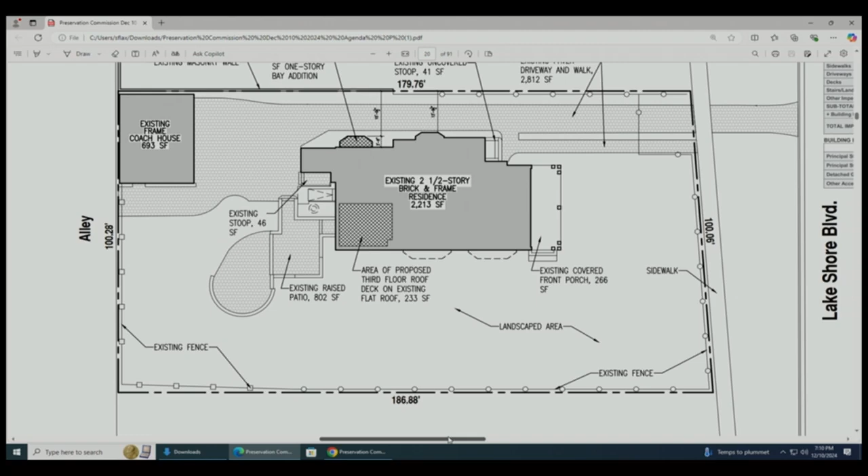This is a fairly simple project. The clients who purchased this home care a great deal for the historic integrity of the house and have tasked our design team and our consultant, Paul Janicki, with extending the life of this house by modifying the interior slightly, by renovating bits and pieces of it, but simultaneously taking care of the historic fabric of this home. So we have two projects for consideration by this body this evening. One is this one-story bay addition, which is an extension of a kitchen remodeling. The other is a railing that we wish to install along an existing terrace on the third floor of the house. If you want to give me the next slide there.

The addition that we're proposing, the bay addition, is behind this existing bay, which was put on by Mayo in 1906, we think. The foliage and the property line obscure it almost completely from view. This is the view that we're looking at here. And if you go back up just a little bit for me, there you go. There we are looking down the property line. Again, you can't see this bay. It's going to be quite nice, but it's not visible clearly from the public way.

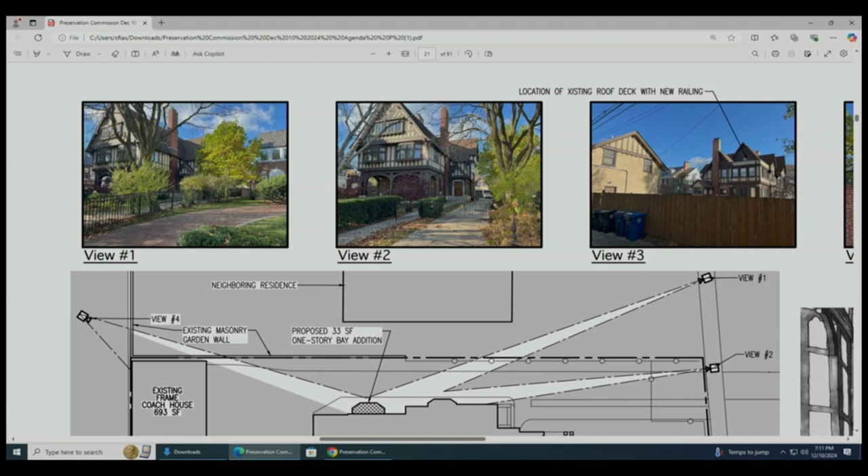But this is the parapet wall behind which we wish to put a steel railing that'll be set on the backside of the parapet. The parapet's about a foot, probably 13 inches deep. We'll mount that on the inside of the parapet wall. So from this angle, you'll see approximately 16 inches of that extending upward. We powder-coated bronze to match the trim and the half timbering on the house. So again, relatively invisible from the distance there. If you could give us the next slide, please. If you can scroll up, if you can scroll over to the right just a bit.

There we go, thank you. Well, could you just pause for a second? Sure, we're trying to dim the lights. Do you know how to do that?

That's it, that's it, thank you very much. Sorry to interrupt. That's perfectly fine.

So again, the rendering of the bay addition, as if one were standing in the drive looking right at it. This is the edge of the Mayo addition, from which we're taking some cues, as you can see in the photographs to the side. The detailing in the bay, these crested and profiled wood panels, are consistent with the addition for the entry that Mayo did in 06. The proportion of the bay matches the other sides. We've taken cues from the house, both the south and north elevations, where bays exist on this house, some original and some added later.

The half timbering is existing. We are replicating that half timbering and continuing it. This is an existing one-story bay, or one-story mudroom off the back, that will be reclad in keeping with the rest of the house. You can give us the next slide, please.

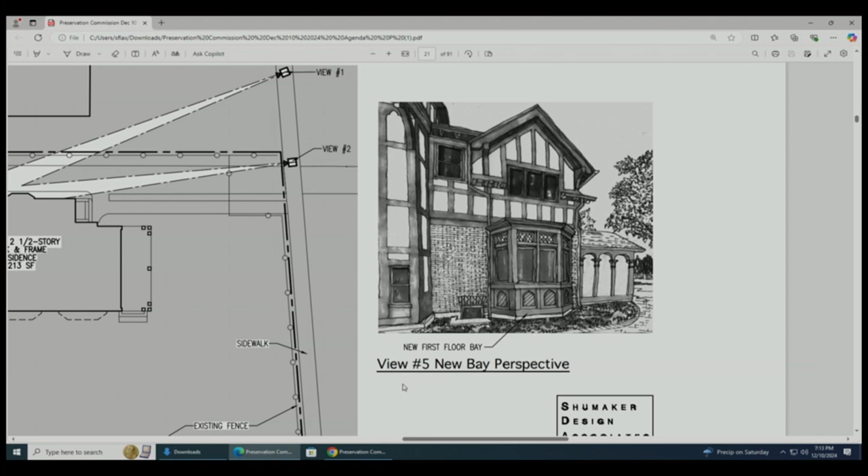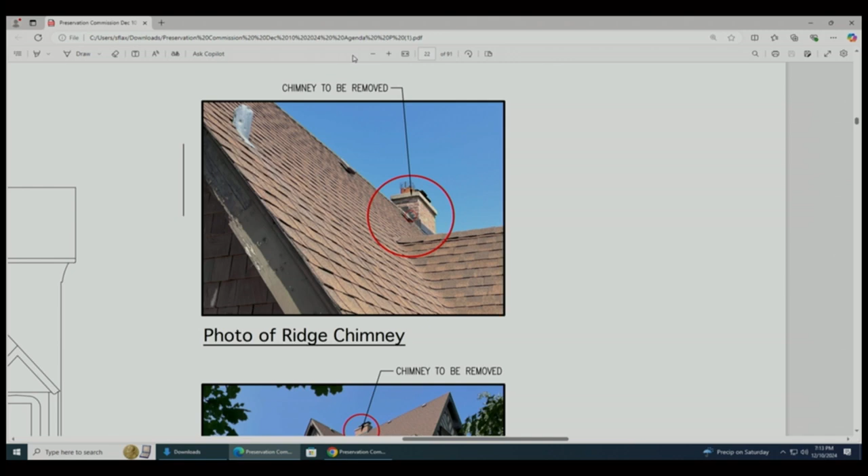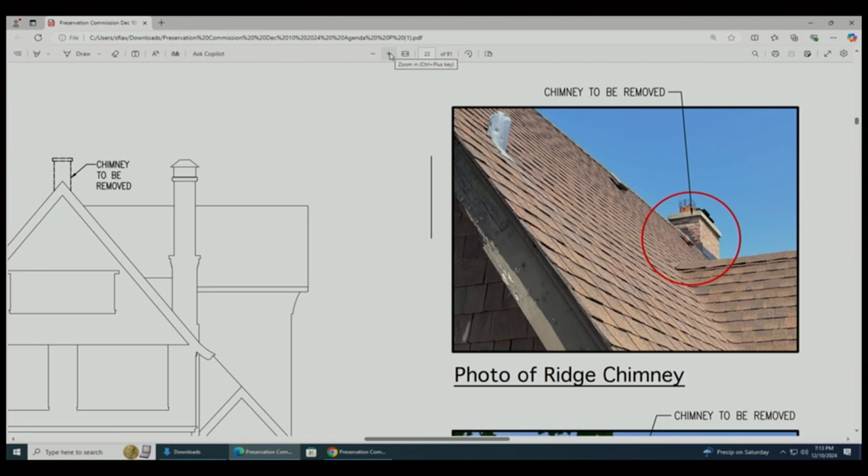Can you zoom out just a little bit so we can see the full slide? Hit that minus button. Is that just going to move your pages? There you go.

So the bays I'm referencing, there are existing bays on the south side of the house over here, from which we've taken our cues for the proportions and the trim work, the cornice, and the paneling.

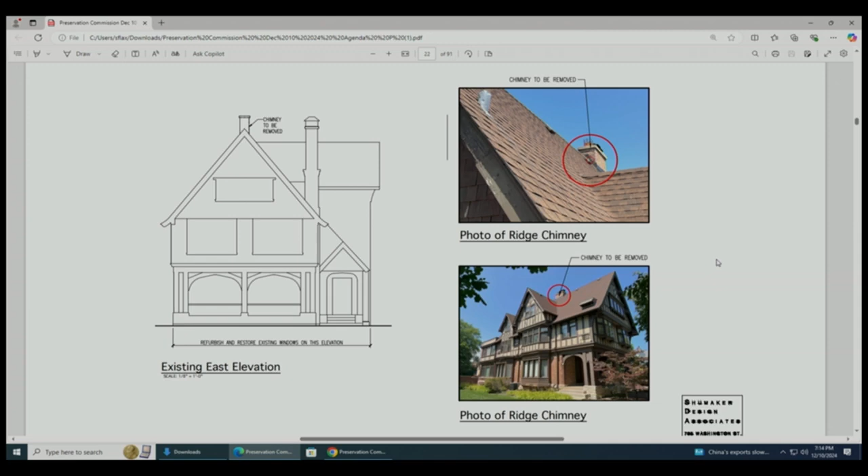The other piece of this project is the removal of this abandoned chimney in the center of the house. As part of the 1906 remodeling that Mayo did, they took the main chimney out of the house on the first floor and suspended it on the second floor. It's non-functional and needs to come out, so we're going to take that down and patch the roof.

If you could have the next slide, please. This is the Mayo bay we're talking about, and this is the half timbering. This is the bay. This is the location we'll be putting our bay on.

The kitchen was remodeled, we think, probably in the 90s. These are non-original windows. We'll be replacing those with the Marvin Ultimate windows shown in our elevations. And this is that one-story mudroom addition that we'll be recladding.

The next slide. That's the existing window, that's the existing bay. This is the context of that Mayo addition, which included this dormer and this volume on this side. Next slide, please.

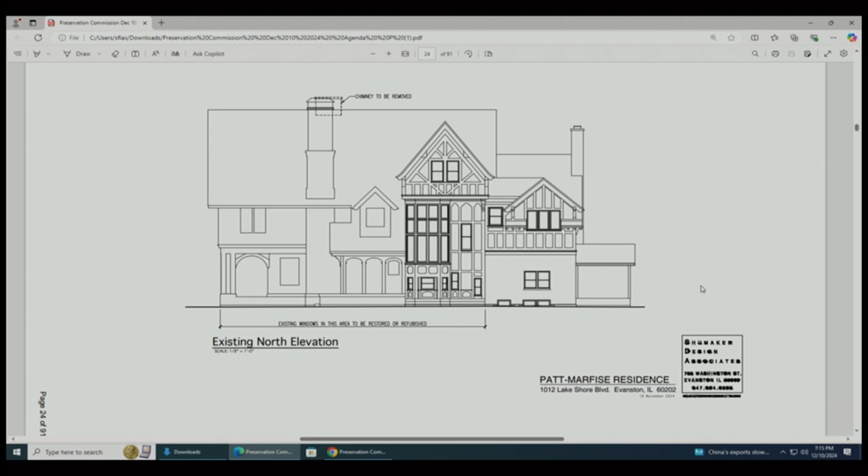And here is our addition. We've lined this up carefully with the gable and the bank of windows here, and again taken the detailing from the Mayo additions and modifications and brought them across, combining the bay from the south side with the bay on the north side. So the next slide, please.

More photos of context. There's that parapet looking from the yard, again with that steel railing set back about 13 inches from the leading edge, mostly obscured. That parapet wall is probably 20 inches high, so our full railing comes to 36 inches, so you're not seeing much of it.

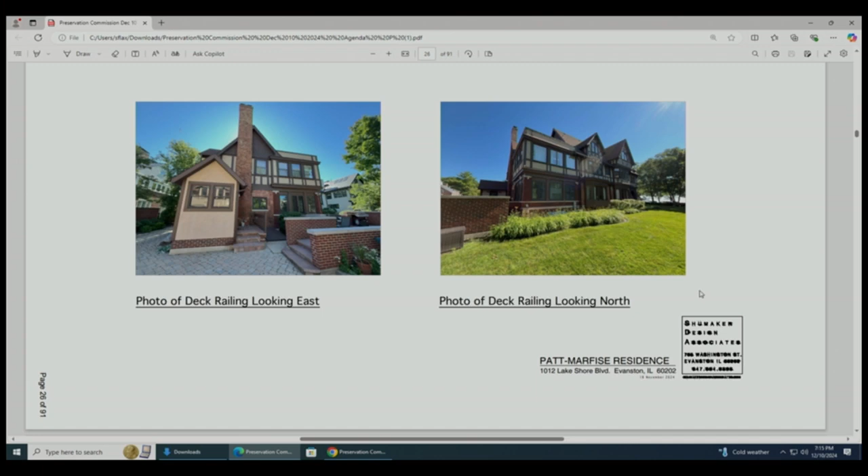The next slide, please. There's the flat view, so you can see the section of railing that we're adding to the back side of that.

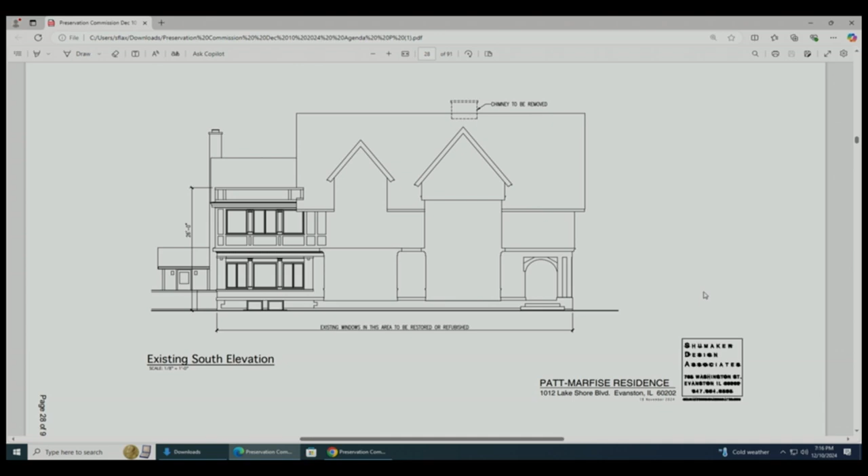Next slide. That's the existing south elevation, and the one after this will show you the railing profile from that side. There we go. So there's that railing on the top.

Would you mind just zooming in a little bit on that, on the railing detail? Is that enough for everybody, or did you want a little bit more? No? Okay, all right, thanks.

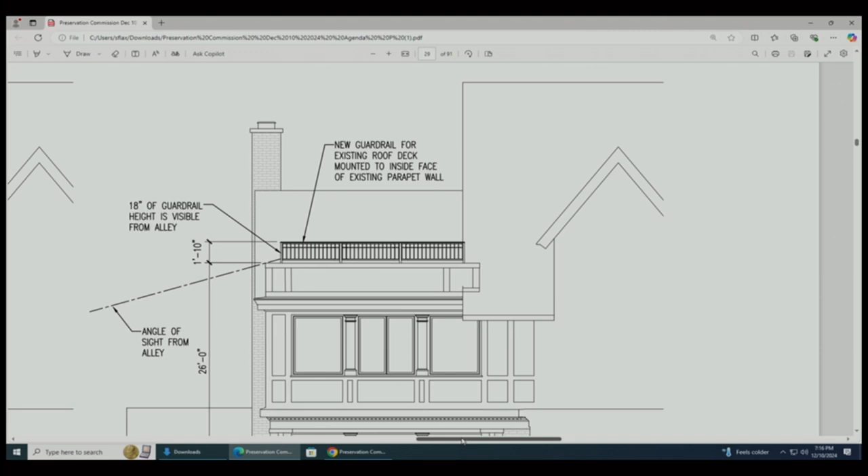Okay, I think that might be our last slide. Is that right? I think the next one is probably windows. Yeah, yeah, the cut sheets for the windows in the next slide.

So again, using a Marvin Ultimate casement window on this, which is obviously a Landmark Series window, color matched to align with the house windows and the existing fabric.

Okay, is that it? Okay, that's the scope. Any questions for the applicant?

Thomas, in the photos there was a gas meter where the bay is going. Is the gas meter going away? No, it's being moved. We're relocating it slightly to the east. Okay.

Other questions for the applicant? When you remove the chimney, you're going to patch a new roof, obviously. Is the whole roof getting re-roofed? No. The inspection reports, when the owners purchased the house, put the roof in serviceable condition, so we'll match the existing.

Any other questions for the applicant? Okay, seeing none, thank you. Any members of the public who wish to speak? Okay, that concludes that.

So we can begin our deliberation. Did anyone want to start with some thoughts about this? Just want to thank the applicant and architect for a very thorough and wonderful design. I think it fits the house well. I would second that.

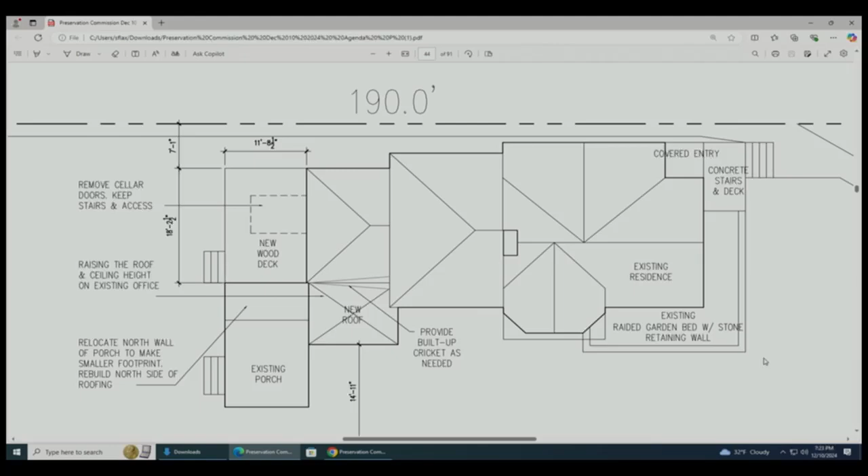You won't be able to click it. Just tell me if I should advance. Okay, so this is the roof plan. Basically, in this plan you will see there's a new deck that we're proposing.

Below is an existing cellar door that we're keeping, but we are removing the covered cellar doors, per se, and building over it. This would only be a means for exiting and/or moving storage. It would be kind of a hidden door within the deck framing. By doing that, we were able to use this wall that was originally very predominantly just functional—it had about 3 different types of windows, and the screened-in porch extended farther into this.

So they want to hold on to this existing porch, which if you looked at the photos, you would have noticed it clearly was added later on. It was one of the reasons why they bought the house, reminiscent of Camp Echo and that kind of outdoor connection of charm. So we're holding on to that, but we're shortening it so that we can open this up and connect the space out to the backyard.

And so this is a brand new deck. And then this on the second floor is a new roof that is housing what was a sleeping dorm and is going to be proposed as a new office space.

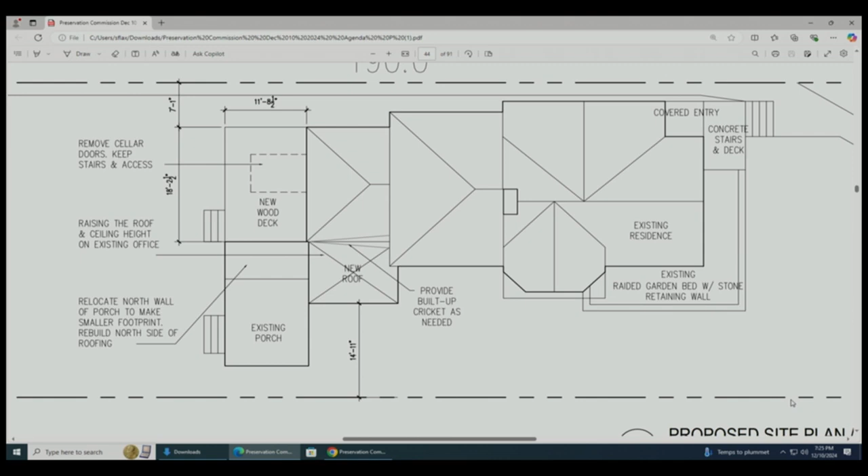Oh, that was the existing, if that's helpful. So you can see the cellar door, and this dashed line represents the full existing porch. We're just going to cut it off and then create a space for a deck. And the second floor, the new office space is the existing sleeping dorm with a shed roof.

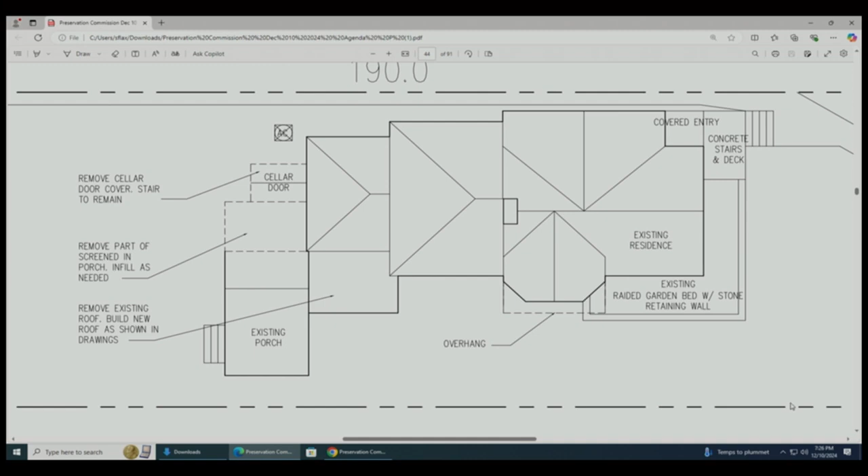Okay, this is the second—or no, I'm sorry. Is there a way to zoom in? Yeah.

So as you can see, this is the old sleeping dorm. At the second floor, you had to step down, and the ceiling height was very low, so it was a very awkward space. But they love the light that's in here and the space itself, so we're connecting this to like a master suite with an office space.

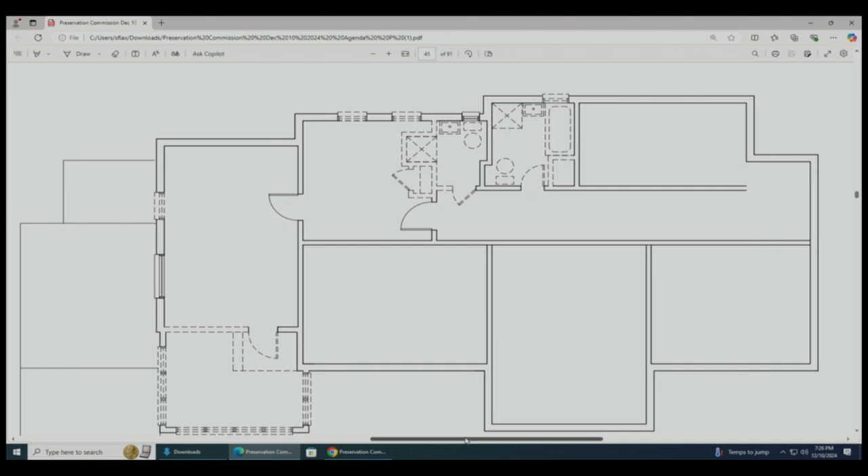You can continue. And this is the existing first floor, where I was mentioning there are three different types of windows and a door that goes into the screened-in porch and the cellar. And this is the existing kitchen that we're relocating into this bigger area, what was the dining room.

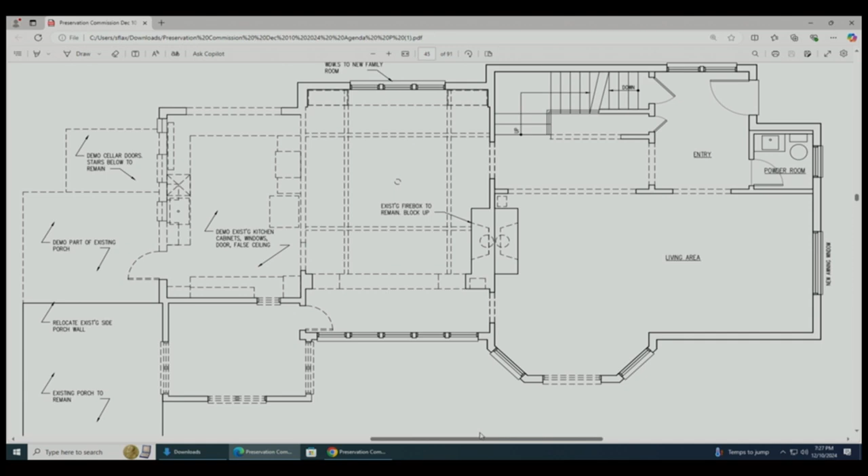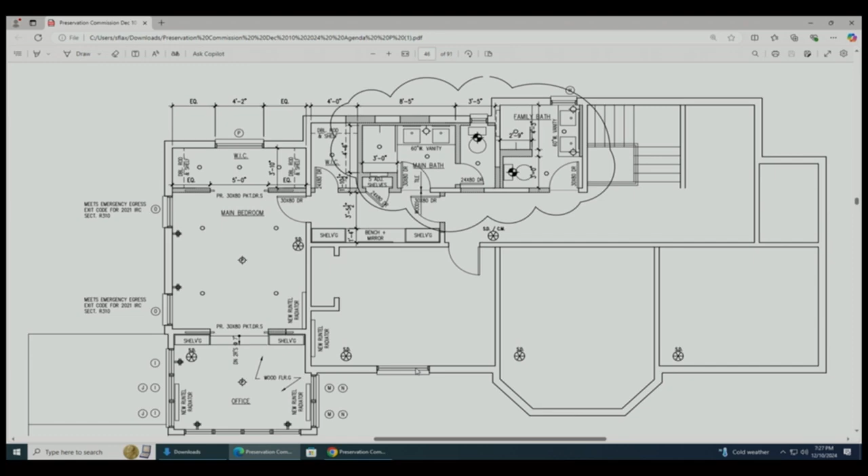In this plan, you will see the new windows we're proposing, which also have transoms you'll see in the elevations, that wrap around this existing footprint that we're just extending upwards. Also in this, there are some new changes in fenestration that we'll see in the elevations.

This is the first floor plan with the new proposed kitchen and eat-in kitchen area and a new family room. So this wall now is cleared so that we can propose a visual connection to the outdoors, their backyard, with a deck as well. And then we're cutting the porch back, and we're building back that screened-in area so that they would have a connection from the screened-in porch to the deck.

Here, all these openings are remaining the same. We're just replacing them because they were like plexiglass, I believe. It was a very unfinished space as well, and we're creating a mudroom there.

So if we can zoom out a little, then you can see both of them at the same time. Can you scroll that way? Oh, great. Okay, so this is the existing west back elevation. And this is the existing bedroom, and this is the existing sleeping porch.

What we're proposing is to extend the height and add what we wanted to try. These windowsills are very low—just over a foot above. So the challenge was working with the footprint and keeping the windows in proportion with existing windows and the transoms above, all the proportions, as well as pushing the turret up high enough so it's not connected to the existing roof line.

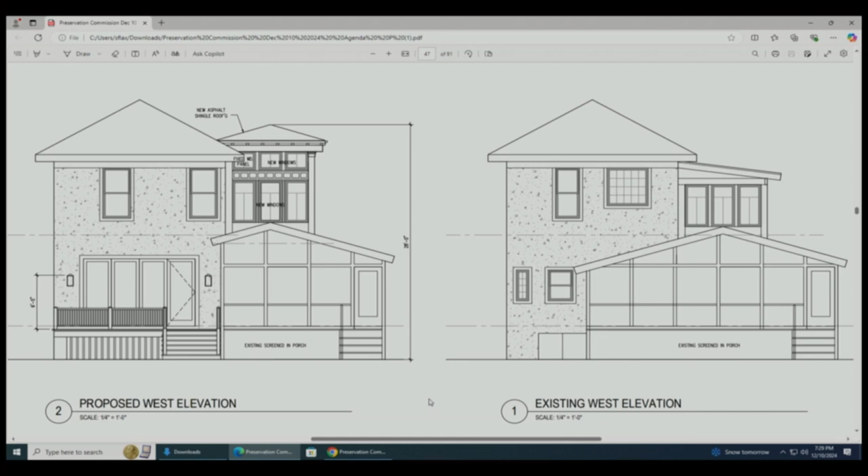And then you'll also see this large opening, which is replacing this area of glass—so the connection, once again, back to the backyard. And this is reflective more of the interior bedroom with symmetry between the bed. And this is what it was originally. You can scroll down.

Could we possibly see those both at the same time, or? I don't know if they'll be too small. Okay.

So on this elevation, the changes are really only this turret, office space with the transoms above. We're keeping this detail—the style of the windows and the proportions of the windows, materials—but we're just adding that extra transom, and then we're changing the style of roof for the water to drain properly, because if this was to go above it, it would almost become flat. You want to scroll down to the next?

Okay, this is the north elevation.

In this existing dining room there are 3 existing leaded glass windows that we're proposing to move over to the new family room area. So we're going to salvage those and relocate them. In keeping with the west elevation we looked at, the proportions of these windows reflect the same style of windows and mullions that are also in the office space upstairs. These will be in a similar location as the original leaded glass windows, but to get more light, and the sink is in front of there for connection, once again, outdoors.

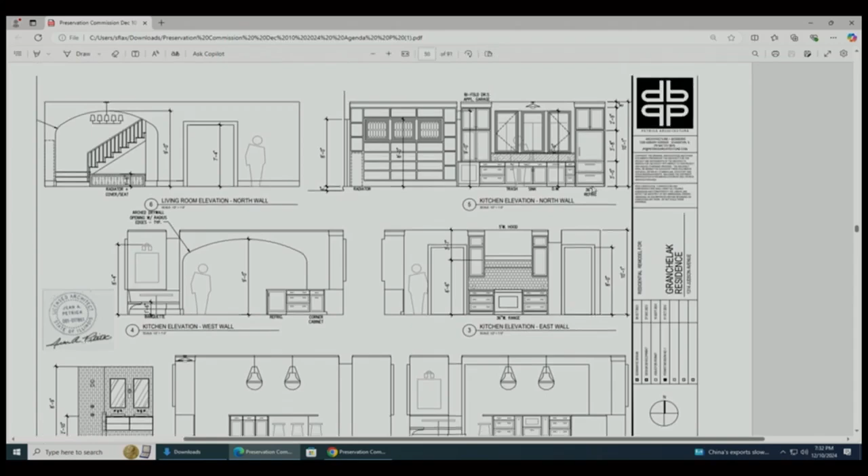I'm not sure if that's the last slide or not. These are all interior, so I just gave you the whole set.

Oh, is there any of the photos? Is there a rendering we could see? Oh yeah, I'm sorry, here. Could you go through with us? Yeah, so this is the rendering. I'm sorry, I keep asking you. Could you possibly zoom in a little?

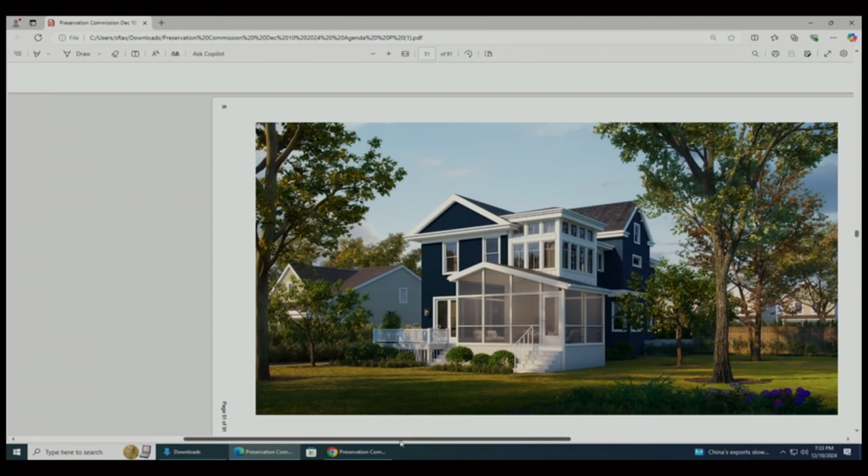So you'll see the truncated screened-in porch. I had to pick a view to get it rendered, so this was the view I chose so you could see the office. You'll notice the renderer shows the roof line coming into the window, but this window would actually be a solid wood panel, so it looks like the roof line is going into the window, and that is not correct. You'll also see the deck here, and you can see a little bit of visibility of the opening into the new family room.

This is the existing house, the front elevation, during Halloween.

This is existing - the existing screened-in porch. This is the existing sunroom, or sleeping porch room, that we're going to extend up vertically, and we're going to keep introducing this trim detail between the transom above and the windows here. I think I just threw that in for fun, but none of this is changing. This is the back of the house as existing, so approximately at this point we'll be truncating that so we can gain an open porch and an opening into the backyard.

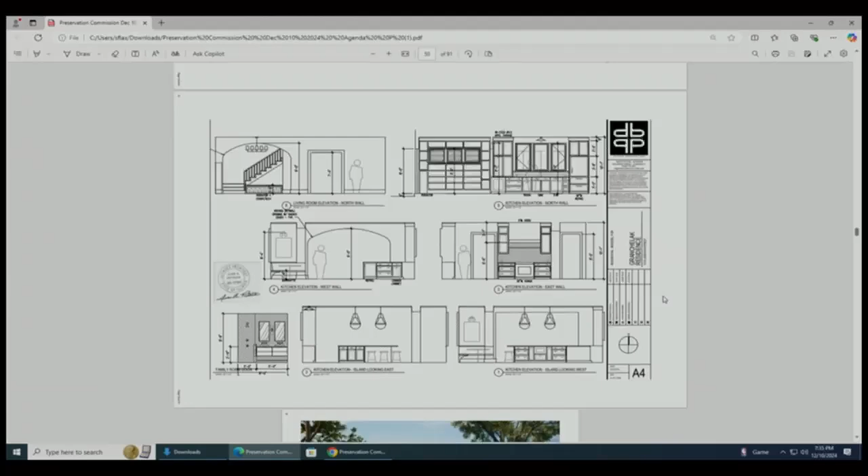So the photo of the bay with that in your drawing - is that the south elevation? Because in the drawing it shows that there's a new window, a multi-light window, going there. Is that happening or not? Yes, happening. Yes, I just glossed over that, I didn't mean to. Maybe we could go back to the south elevation. Thank you for pointing that out.

So right now you can see there is a leaded glass window up there currently. To gain more sunlight and capture that south sun into this double room inside, where they're going to have their dining table, they wanted to add a larger window. So I introduced a window similar to one up in their bedroom that we're also relocating and using again in style. This is also at the front of the house, which when we scroll through the photos you'll see is similar in size, scale, and mullions, etc., to the front window.

So that's a leaded window that's being replaced? Yes. Okay, could find a home for it.

So actually, I was going to ask about that. Currently, you don't have a plan to salvage that window in the project? The window that you're putting in to replace it, the larger one - did I understand correctly, that's a salvaged window from the back of the house? No, I'm sorry, it's similar in scale and scope to the window that's up here. Yeah, that one is being relocated on the north wall, or the north elevation, in the bedroom.

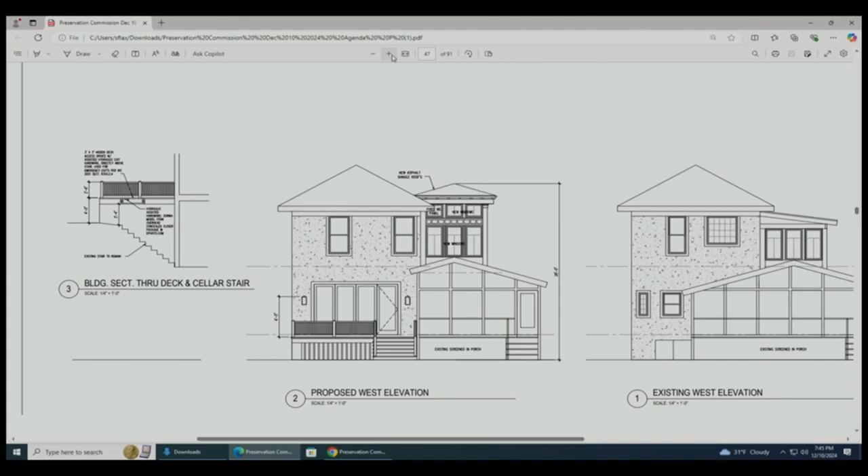So it's not going to be glass, it's going to be like a panel that will have the mullion pattern. I wanted this to be pronounced, to not align with this, and I was also having a challenge with the window's scale. So this was what I'm proposing: a fixed wood panel that would be insulated just like a wall, but articulated like a window frame, if that makes sense. And then this roof, the drainage would still land on this roof and then drain down.

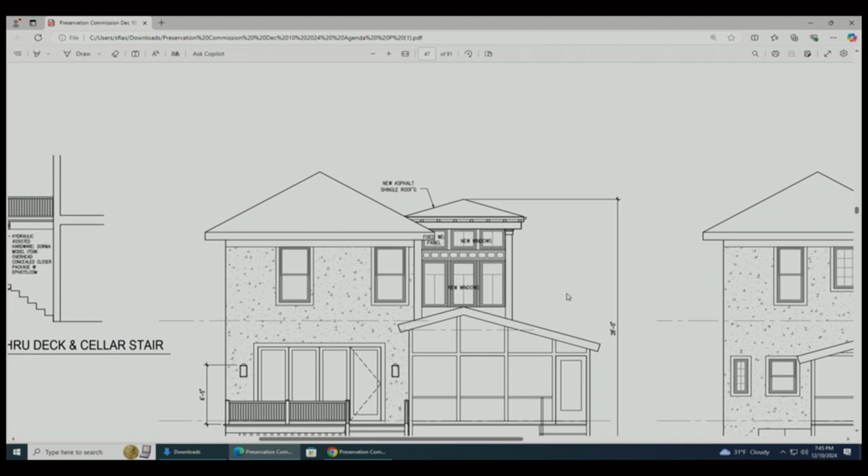So that's actually a set of questions I had about the roof for this new office turret. Is it touching the existing roof, or is it up above it? Because I thought I saw a cricket in your plan. Yes, it will, I'm sorry. So right here it will die into the existing roof, and we will have to cricket to some extent to get the water out.

I just didn't want it to start to compete too much with the house. Fair, I mean it was secondary initially. We wanted to have fun with it and have a neat space on the inside, as well as the roofline's challenge with the spacing, and also maintaining that existing articulation with the windows. I have considered lowering the roofline so that this eave would match this line. I can't remember why I didn't do that. I think we had to have some large structural framing between the transom and the windows because of the span and the size of the windows, so that kind of introduced this articulation of wood trim.

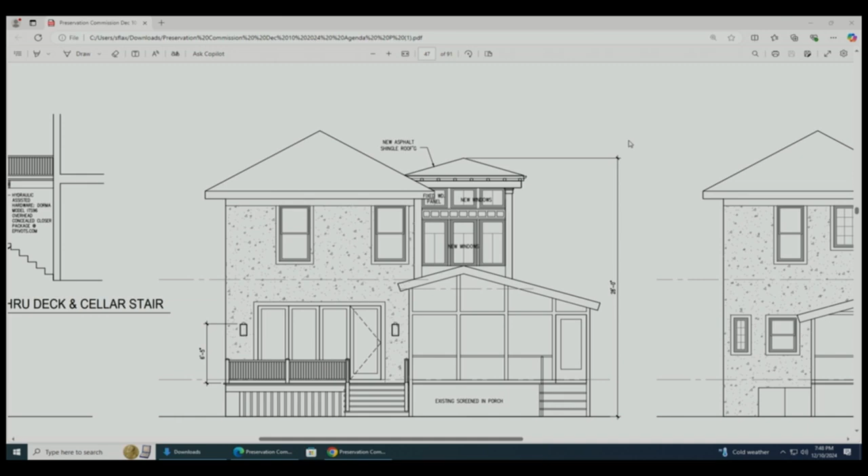I think we're looking at the west here, right? Yeah. Could you go to the south? So that was, if you wanted to, that was existing. This shed roof kind of dies right underneath the existing roofline. And the proposed is below this. There we go.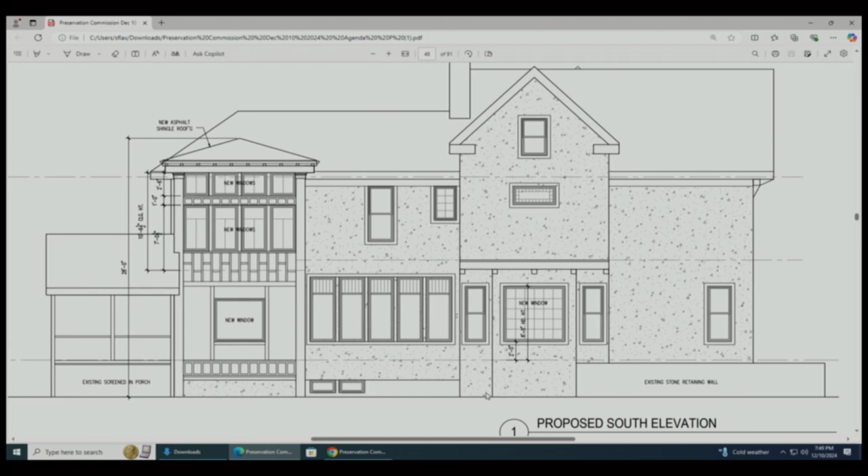And those are like two-story pilasters, or kind of, with capitals on either side? Oh yeah, well I'm just extending the trim detail that was existing. But it reads kind of like a very two-story tall capital. Yeah, and that's how it was originally articulated.

So while we're looking at this elevation, I do have a question: the photo seems to indicate that that projection off the house originally was one story, had a shed roof, and that this sleeping porch was added on top of that. In fact, the existing home still has that outer edge and eave overhang of that shed roof poking out from this now complete two-story, two-and-a-half-story, whatever, tower. So the question is, are you keeping those little wings of the original one-story roof, or are you clipping it off as this image shows?

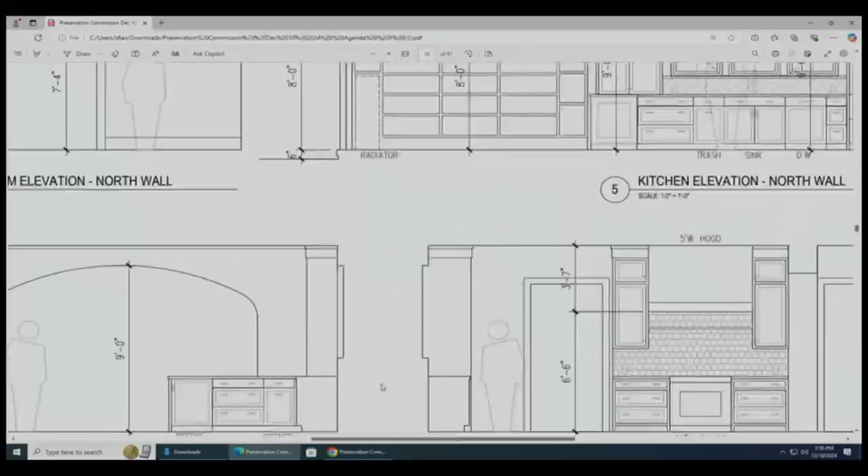I'm sorry, I don't think this will help if we went... Okay, can we go to the photo? Are you talking about that condition at the first floor? The detail on page 53, at the first floor, or at the roof of the first? One more, I think. Yeah, right there.

So are those staying or going? I was proposing to remove them. Because it seemed haphazard, like this was built and then this was built. I don't know. It breaks it up - is that what you're getting at, as opposed to what? Because it's so vertical, it's more... In assessing the whole piece now as it's being proposed, it's important to me to know if that extra element is there, basically.

And the outriggers. And the rafter tails? Yeah. Along that line, the new one has something going on above the fascia, below the roof. You have something indicated there. They look like dentils to me, but I was trying to mimic these brackets - even though the roof itself is not the same type of roof, the detailing of the eaves and the overhang would be the same. So you're getting rid of them below. Is that the rafter tails you're referring to? Yeah.

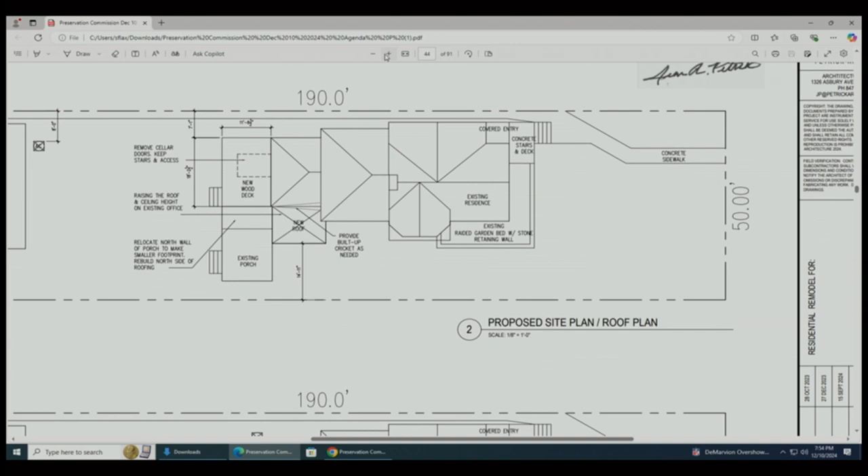The roof plan, yeah, if we could look at the roof plan and then the elevation. Right, so the new roof, the cricket, and the existing hip, which is shown as a gable in the rendering, come together right there on the west at a point. So I guess I misdrew this - it's hard to read that roof line. I wish I had a... No, I think it's pretty clear. I mean, there's a hip that's... I wasn't sure though if this will run.

It's hard to tell if this will run. I think this is drawn incorrectly because the turret wants to be higher. These two roof lines are at the same height, so this is all off that. I should have drawn it like that, and then the cricket would have gone in both directions. So I think the roofs need to be resolved.

And the other thing - I was just curious, there's going to be a downspout taking a bit of water there, and it looks like it's coming down next to or into the deck or the screen porch. So I'm just asking how these things are all solved. Yes, there will be a downspout at that corner that will shed directly under the deck and spill out to the yard, feeding the garden.

I've got just a few quick questions to go through. Did you say what materials the windows are going to be? They will be wood clad. So clad with aluminum clad? Mm-hmm. Okay, and then, just curious about the leaded glass or the thin muntined window - did you consider bringing in light, did you consider keeping it and putting a window below it?

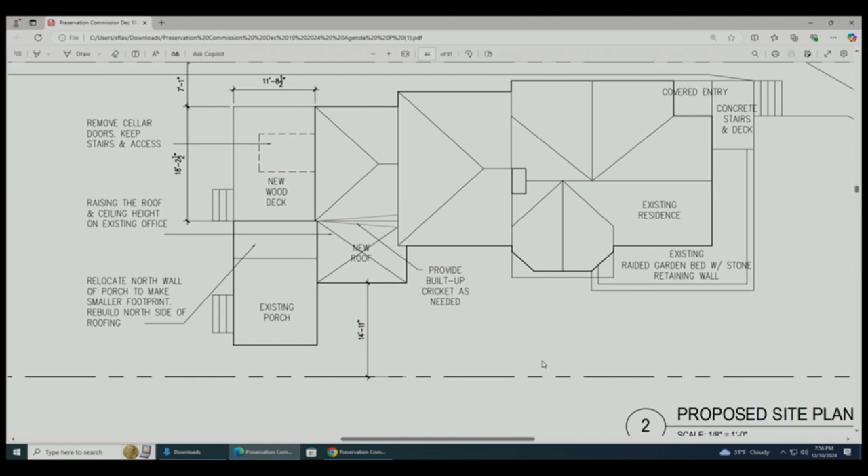When you're looking inside the room, there are so many types of windows in the house, and they wanted to bring as much light into that part. In the living room, there's one window up here, then a sliver window, a very high one, and two double hungs. We wanted to flood light into this space, so this window is here, and it made sense because these windows were at the same head and sill height, harmonizing the room instead of having different types of windows. It looks like what you're putting in is a window with a bunch of muntins, so if you had a picture window below with the sills lining up, there'd be more light with less opaque material. It's actually wider too, the new window is wider. It'd be a way to save the window and still fit in, with more detail on one side and more opening on the other.

You mentioned the windows are moving around, requiring patching and repairing. Is the entire home, or just the planes where windows are moving, going to be completely sprayed or stained? So we don't see the patched areas, it would be patched and repaired to match existing materials, but also recoated from edge to edge on those planes, so it would look like it was always there, with no reminiscence of the old window locations.

Not to beat the turret into the ground, but did you consider it as a bay rather than something that had to go up above? It seems like the problem of getting water off is kind of a problem of your own making. The space on the other side, the main house, has okay ceiling height. I'm wondering if the roof came down so that band was continuous, you might not need a cricket, because it seems like the two are kind of competing. It's not subservient to the main volume, and it's not sticking up above the way we'd expect a turret to. So if it were a bay, it might just fit in, instead of creating a roof condition that requires magic.

I think the rendering's above the photos. There you go, we just messed up. One down, there we go. So imagine—can I, you're going to have to zoom in.

I'll double check the pitch of the roof and the window sill requirements, but I think I can accomplish it. Actually, as you can see in this perspective, this pitch would go—you can't even see the pitch of the roof, what it's doing. So it's not really visible to anyone. The visibility is actually the structure. And then I have a pitch here that slopes down to the roof, but we could just extend it straight across.

I think, once again, both of those won't even be visible. This is a tough drawing to understand because it was rendered as a gable as opposed to a hip. I know that was, sorry, once again—communication with China, I didn't get it.

Yeah, but it would still tie in. I have to check—I believe this pitch will be coming back, but so will this, and it will just land into that roof line, as long as it starts back far enough from where the first one starts and it's not any steeper of a pitch. You'll never leak over the edge of the main house.

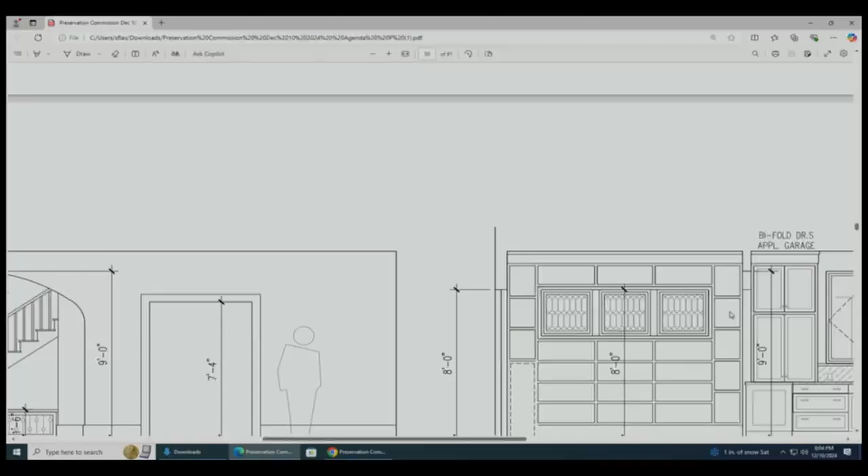Beth, you had a comment? Yeah, just on the west elevation drawing—it's not showing the main part of the house where the chimney is and everything. I think it'd be helpful to see that on the west elevation with all the different roof forms. Oh, you mean beyond?

Beyond, right, the next plane back. I think just to see the whole elevation as its entire form would be helpful. It wouldn't change your ideas, but imagine this line being eliminated, and this would go straight back, and then past that plane, there's the chimney and then the rest of the mass of the house.

And do you recall if the pitch of that roof is the same as the existing main roof here that we see? I'm just trying to picture all the different—it's kind of a complicated structure.

There's actually three roofs on the main body of the house. The front is just a gable roof, and the second one, which I have drawn here, is the hip. Then beyond this structure there's another wall, and that's also a hip that goes up, and then the chimney, and then a pitch at the front of the house.

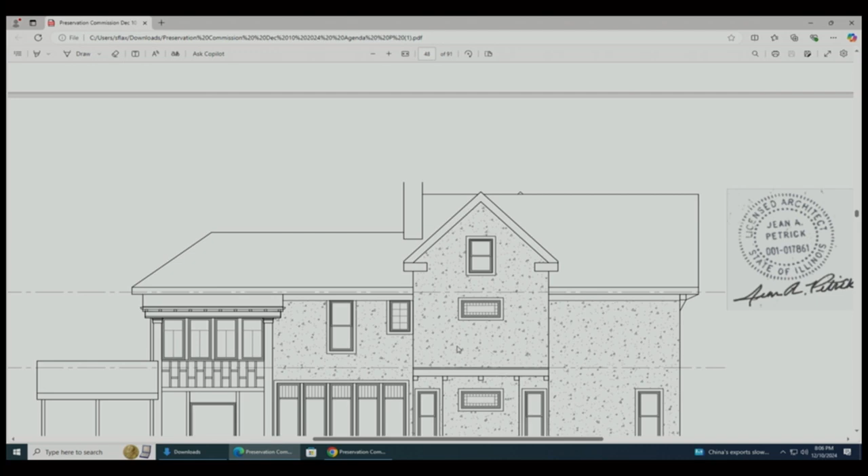So I have a question, because on the south elevation it's drawn as one continuous hip, but on the north there are two before you get to the chimney. So is it only on one side that you can see those two? No. There should have been a line here.

Can you say again where the line should be? Oh, so this pitch right here, there should be a pitch line right here. It's kind of the same roof, but because the width of the house is slightly different, it jogs or projects out farther in this mass. This one is a little narrower.

Okay, we're still in questions for the applicant mode here. Does anybody have any other questions?

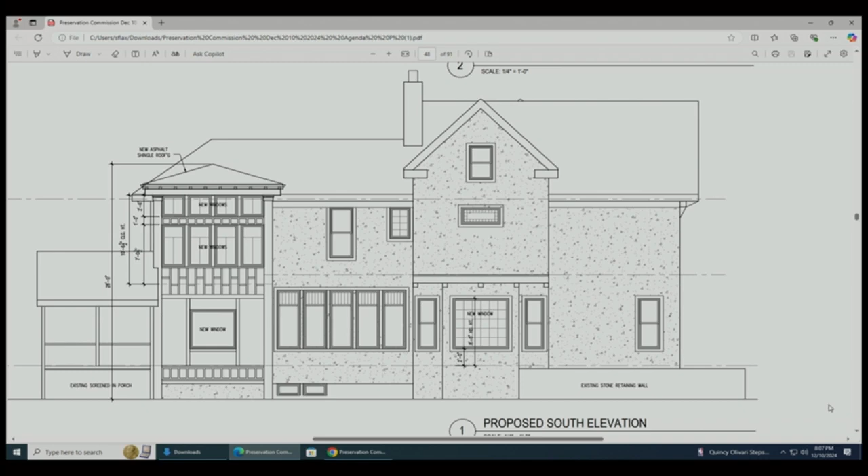I had a question about the screened-in porch and truncating it. Did that decision to just truncate it come from an owner directive, or is there the possibility of reforming it so that you're maintaining the original structure but just on a smaller scale, or rebuilding it?

Instead of truncating it, just actually creating it differently. We did discuss it. I think the concern was more cost, and that would also shrink the ceiling height, which they did like the large volume inside.

Oh, okay. And it's in okay condition to withstand all the construction around it and everything. Let's hope. Okay.

Questions, additional questions for the applicant? Okay, thank you.

Is there anyone from the public wishing to speak? Nope. Okay, well then we're going to go ahead and close this part of the meeting and move to our deliberation. So if we have any other questions for you, we'll let you know. You want me to sit down? Yeah, you can if you want.

Does anyone want to start our conversation? Go ahead. Just want to make a comment on the south elevation. I wanted to echo what Commissioner Ahleman said about adding a window below the existing window in the dining room. I don't know what page that's on, but keeping the historic window with muntins and then just putting a window below it that's just as wide.

Thomas, can I ask you a clarifying question? Are you talking about actually extending just the roof line and having an extended eave, or are you actually truncating it less? Both. Truncating it less, and if you still need more roof line, you could continue it as long as it doesn't hit the door.

Because if you were to extend the eave, that would give a little bit of covering for the door. Yeah, that's what I thought—if I'm coming in the back door, I'm going to be like, why did they cut that out, I'm getting wet. I don't know what's going on in the plan, so it's easy for us to say up here, but if there's some way to reconsider that opening, maybe there are 4 slightly narrower panels, or maybe 3, or maybe they shift over a little so you can get one more bay.

Then for me, it doesn't feel as disharmonious, because it's more balanced, more balanced on the side of the peak. Exactly, right. But it's currently not balanced. I know, that's why I think it actually gets better if you just cut it back one bay. Sorry, it's currently not symmetrical.

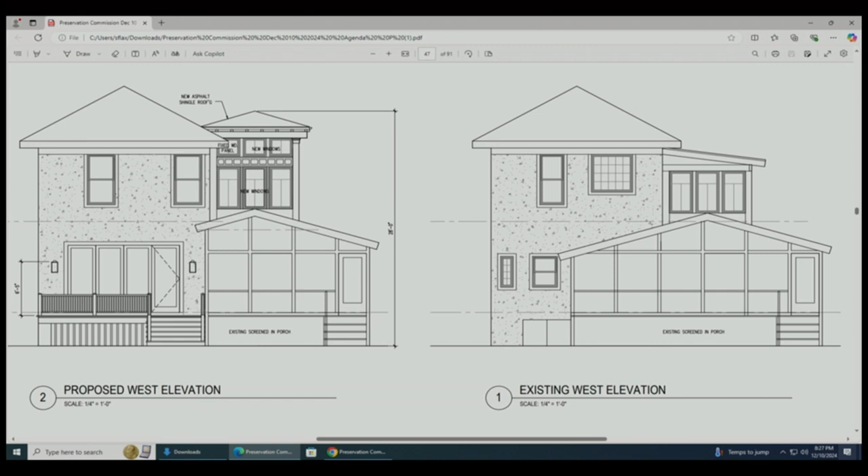Okay, I have 2 comments that are different from everyone else's. On the south elevation, if you bring down the turret, can you use similar windows in the breakfast room? I think that's what you were talking about—there's a gorgeous stained window on the south. You can't really see it in the photo, but they're actually leaded glass windows with stained glass, with a tree motif. I wouldn't want to touch those.

Those are beautiful—I'm not saying touch them, but when your turret comes down, instead of having that big transom over it that makes it feel so heavy, do something similar to that. I could work out the proportions, but that would be too cost prohibitive.

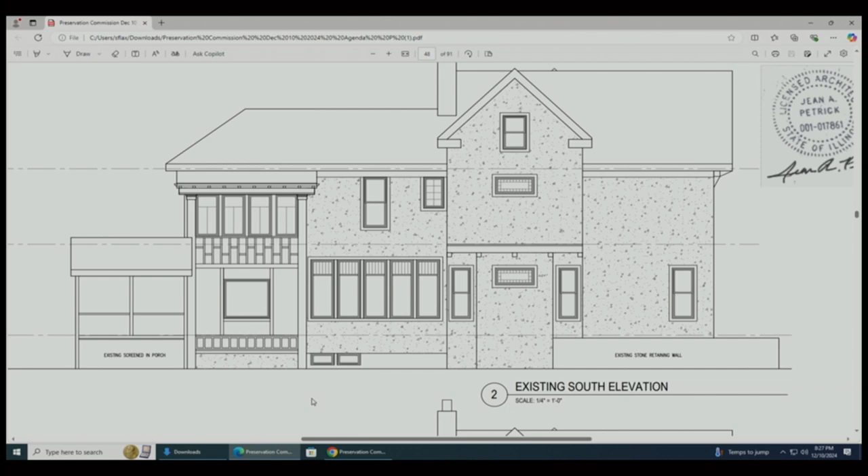And then, strangely enough, I have problems with the north elevation—no one else did, sorry. You have a big, huge window in your new closet on the second floor. Once again, it's about the floor plan—so we have closet space on each side, it's like a cased opening with a pocket door. The idea is that even though the bedroom doesn't function as a big bedroom, you're getting that northern light. If we closed that whole wall with just a door, they wouldn't have gotten the light flooding in, so the idea was closets on both sides and a huge window to flood light into the bedroom from the north.

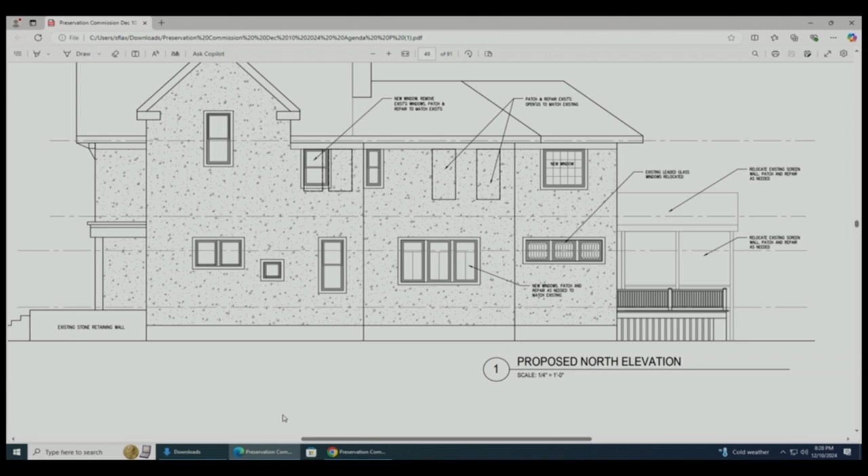We look at solids to voids, and that whole elevation changes drastically.

If you can get both sides of it, that whole elevation changes drastically as far as solids to voids. Yeah, I guess I would argue if we went to the existing, yes, this whole wall doesn't have any light on it.

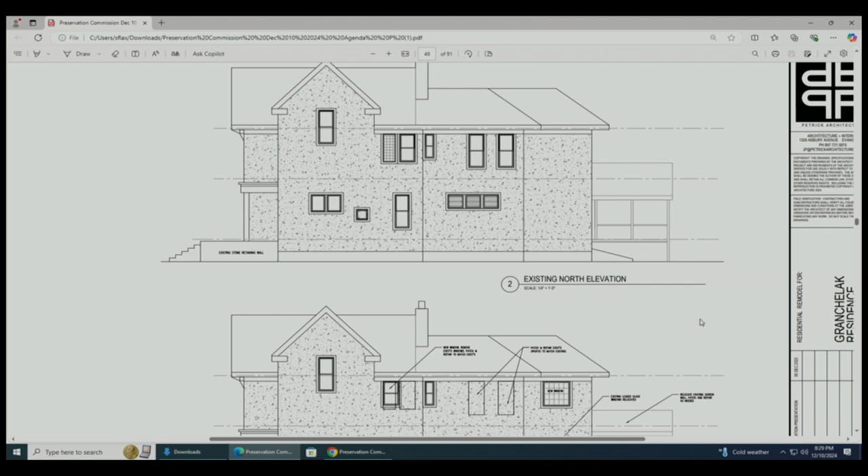But I would argue that all of these are functional other than this, which is a stairwell going up to the third floor. You can see how a lot of them are driven by function. This is the stairs going to the basement, this is the stairs going up.

And this was an old room that we're capturing to function as a master bathroom. So it's just unfortunately, I mean, I would love to bring more light and not lose those windows, but there was just no way to make it function properly to do so. I'm just pointing out to the commission that that's what we look at, voids to solids, and that whole side changes pretty drastically.

So you want to see those windows stay on the inside? The second floor windows, there's a huge window going into the closet. I would maybe argue that the proportions of the glass that we're losing here, we're just relocating over here. I mean, not in the same style, of course, but...

It's just my comment. May I ask a quick follow-up question? Would it be better instead if it was a multi-light window in the closet, if it was reading as a double-hung window or a pair of double-hung windows, for decorative purposes? For me, it would be much better.

Right, we're just putting a big huge window on that we don't see on that elevation at all. We see lots of double hungs and some decorative glass, and now we have a big picture window in the closet. My two cents on that elevation is...

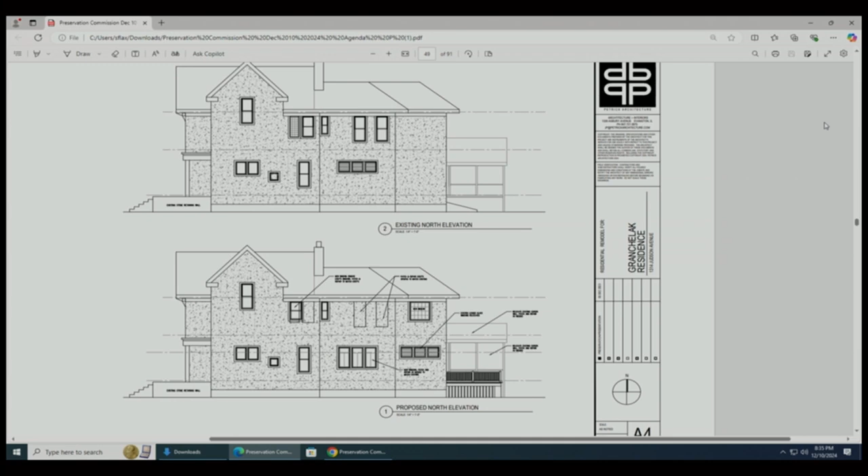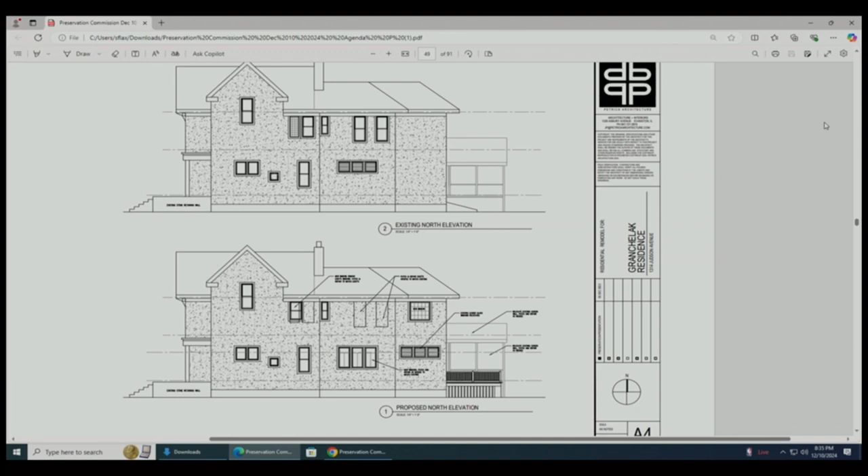But on this facade, it's out of the four facades, what's after tertiary, the fourth, in the sort of hierarchy of significance. So it is true that the rhythm of solids to voids on this facade is being modified, but in the scheme of things, it's not impacting a primary or even a secondary facade. But anyway, I think that's what you were talking about. Yes, number 4.

Does anyone else have anything? It sounds to me like this is a continuance, so I'd like to make sure the applicant has all the feedback she needs in terms of the specific things we're looking for.

Charles, go ahead, is your thing on? Oh okay, yeah, mine's not on either. So the turret, which I understand will be lower in height now, has felt a little heavy and massive for that location, and the horizontal members are so much thicker than the rest of it. I'm anxious to see what the new rendering will look like, because it just seems kind of out of balance, the mass of it, the way it is now.

Yeah, I think the comment that Lisa and possibly Thomas were talking about was eliminating the transom, and maybe needing some kind of different window situation there in order to make it all work. That might help, I just want to clarify.

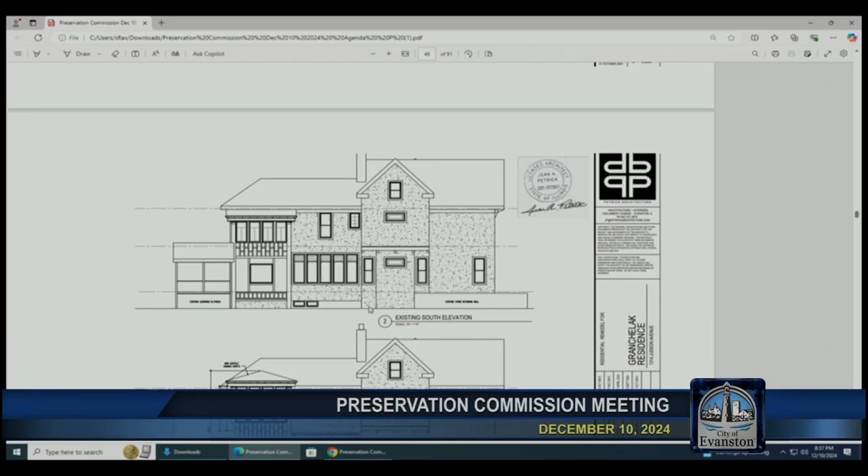Well, that's kind of what I did, but then I added the transom. Structurally, because it was going so vertical, I introduced another structural member between the transom, but I think if I shrink it, I should be able to eliminate that and have a header around the transom, and I think that will eliminate a lot of your comments, I hope.

Okay, so you have a sense of what we're looking for. So we do need to take a vote on the continuance, and so does somebody want to take a shot at the continuance, including some specific guidance for the record for what we'll be looking at next time around? Does anyone want to take a shot at that? John, you want to go for it?

Regarding 1314 Judson Avenue, Lakeshore Historic District, case 24 Pres 0170, that we have a continuance on this case, with particular focus on allowing the designer to look at the height of the turret or tower, and address the transom or no-transom windows as part of that, as well as what happens with the one-story former addition, with there being, I think, a majority of commissioners feeling it's probably fine to leave that as it is.

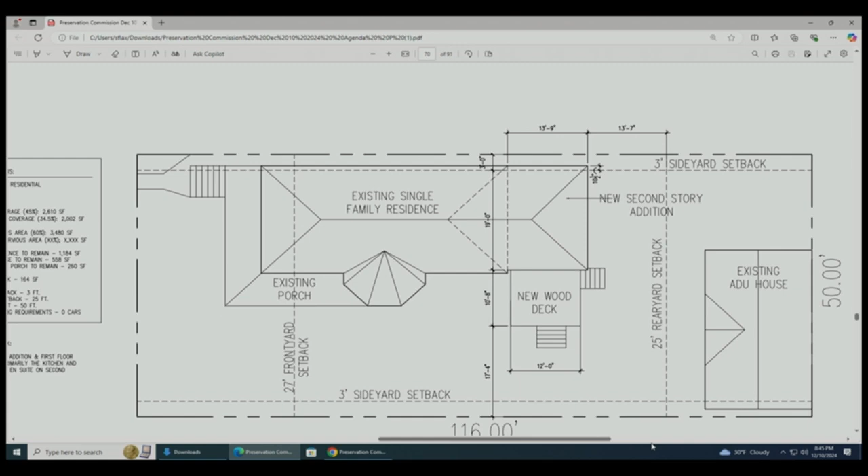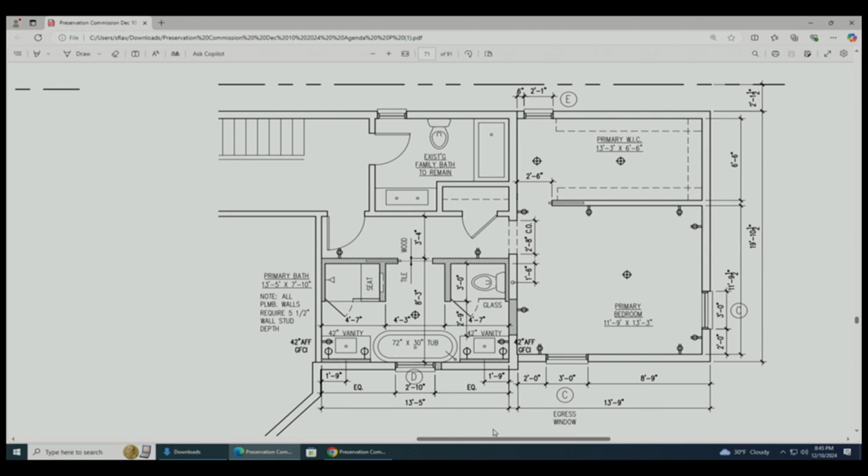You can scroll down. So this is the new second story space, and within the existing bedroom, we're proposing a master suite, basically with a walk-in closet and a master bedroom, and then adding a new bathroom. This is the current family bathroom. You can scroll down. In the back, this was the existing footprint, and so we are basically remodeling the interior of it, which is affected also by window fenestration and doors and a deck.

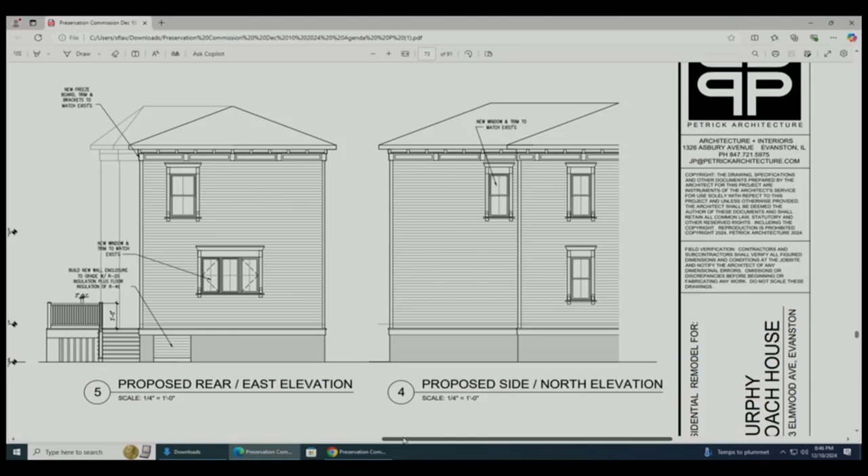You can scroll down, keep on going, I believe, because I bundled the elevations together. Okay, so wait. Shoot, I think this is the old file. Yeah, I hope you guys... oh wait, hold on. I'm sorry, can someone zoom out a little? I think I have all of them lined up. Okay, I was thinking, so they're not side by side, but they're vertical. So if we can see a row, if you want to see the lower half, you can see the existing is on the lower, and then above.

So this is the north elevation. This is the existing kitchen, and we're building up above this a whole second story. And then that roof line is going to tie into this existing hip roof, so this actual would disappear on this side. And then this is the east elevation of the house, where this is the existing kitchen, which accesses into a mudroom area that goes down to a porch. We're keeping the cellar door, it's remaining.

And we would lose this. So this wall that's shown behind the kitchen will all be gone. So we're going to salvage as much of the existing brackets and eave trim and eave details, even the surrounding trim of the windows, which is quite unique.

And then, stay here. This is the south side of the kitchen area. So you can see that roof, that one-story roof line. This is the stairs going up to a covered porch and then the mudroom right there. So we're going to fill in all this and also eliminate this roof line and extend it up.

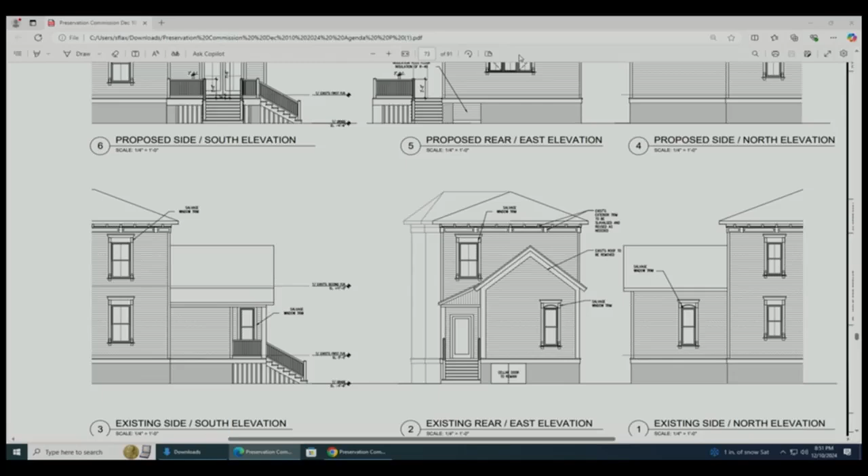Is there anybody here from the public wishing to speak? Okay, in that case, it's time for us to ask questions of the applicant.

Questions for the applicant? Go ahead, John. So on the south side of the house, there are the existing additions on the back of the house, and you're essentially turning that into a 2-story addition instead of the 1-story that it is now. Is that roughly okay? Yeah, building directly upon over it.

And is there an existing foundation under that part, or is it up on stilts? No, there is an existing foundation. Okay, so that really set up the dimension between what was the original house and the addition. It looks like there's only about a 6-inch break between those 2 planes of the south elevation. Yes. Okay, I'm following you. Thank you.

Other questions for the applicant? Will the siding match? Yes. All the details will match existing. They will have to side that whole new addition to make it continuous.